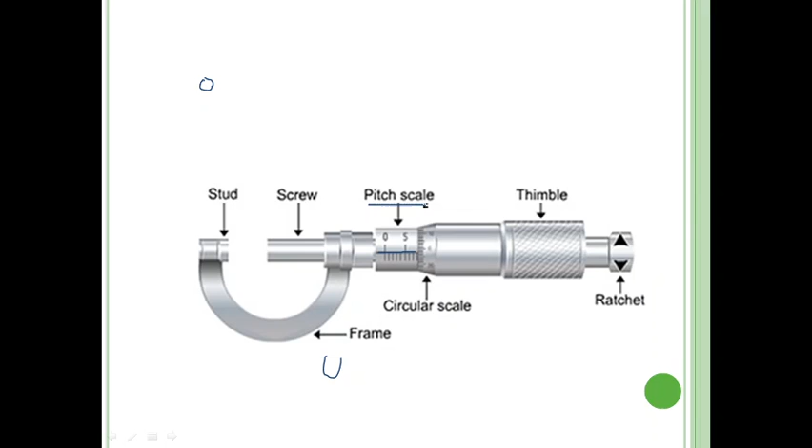We have a cylindrical part over here, over which we have a reference line and small markings made. This scale is called the pitch scale of the screw gauge. These markings will normally correspond to 1 millimeter, though sometimes in certain scales 0.5 millimeter may be marked. Let us take the case of a screw gauge upon which 1 millimeter is marked on the pitch scale, the cylindrical part where we have drawn a reference line and small readings of 1 millimeter.

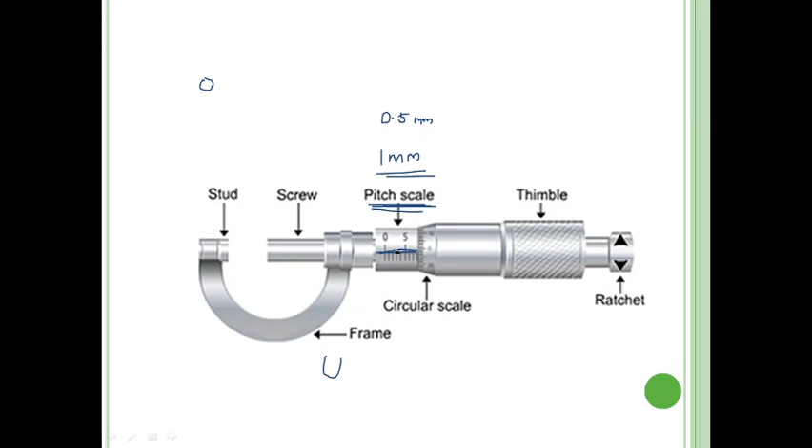Now over this cylinder, we have a cylindrical shaped part which can slide over this pitch scale. This is the circular scale, or the head scale, of the screw gauge. It is cylindrical in shape and is connected to a thimble, a cylindrical shaped thimble, and this part can slide over the pitch scale.

In order to enable this mechanism, we have a ratchet here. We rotate this ratchet and the rotations are transferred to the thimble and head scale, which slides over the pitch scale gradually. These rotations also move the screw attached here, since internally they are connected, and the screw moves forward or backward as you twist this ratchet and thimble.

Finally, at the other end we have a stud which stops the motion of the screw. So these are the different parts of a screw gauge.

We have a U-shaped frame and the pitch scale, which is the cylindrical part over which small divisions of 1 millimeter or 0.5 millimeter are marked. Then we have the head scale, a cylindrical part over which even finer divisions are marked, and which is able to slide over this pitch scale. There is a thimble that connects this head scale, and a ratchet mechanism arranged for its rotary motion.

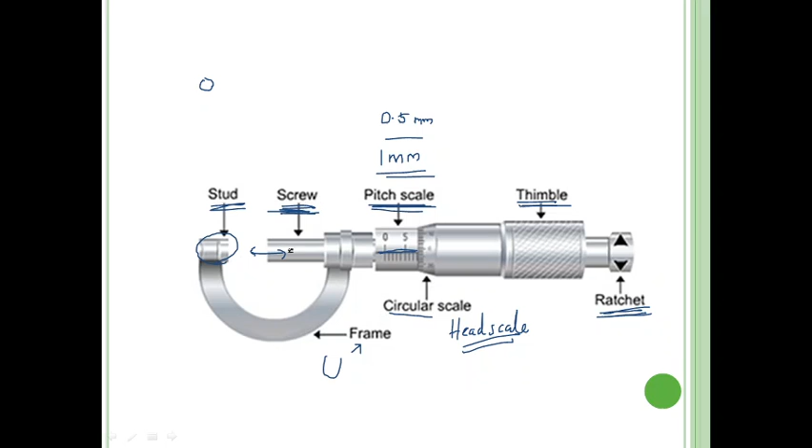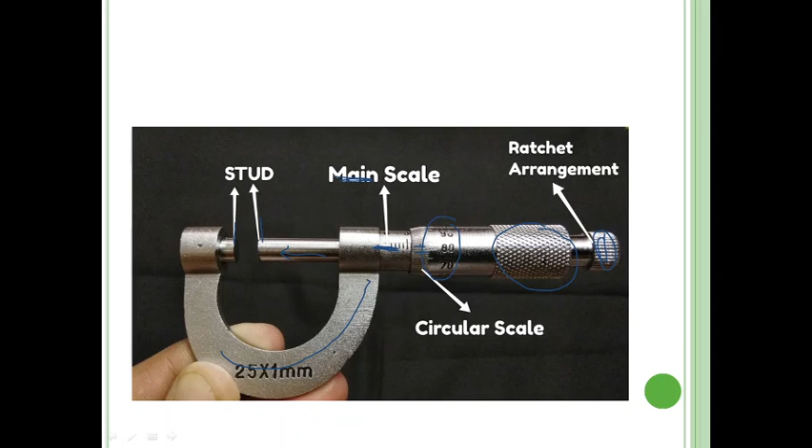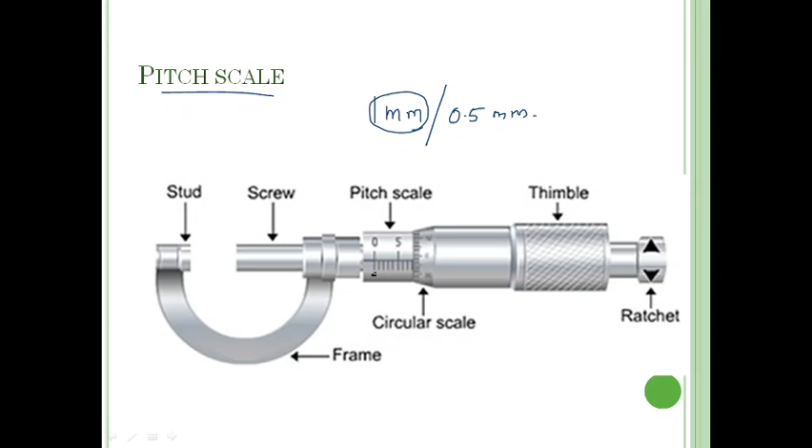Now first let us understand more about the pitch scale of a screw gauge. There is a reference line marked on the pitch scale, and smaller divisions are marked over this reference line. These divisions will either correspond to 1 millimeter or 0.5 millimeter. Let us assume 1 millimeter is the smallest division marked on this pitch scale, so the distance between 0 and 1 corresponds to 1 millimeter here, and this large line corresponds to 5 millimeter reading. That is the purpose of the pitch scale.

We will be taking the pitch scale reading from the pitch scale. We call it PSR, or pitch scale reading. Now there is another scale, the head scale, with divisions marked on it. Sometimes there might be 100 divisions on the head scale, or sometimes 50 divisions.

Let us consider the case when we have 100 divisions on the head scale. In that case, the surface of the head scale, the cylindrical part, the tip will be divided into 100 divisions. Starting from 0, there will be finer divisions, then 5 and so on, and the full rotation will give you 100 division markings.

Now, as I have mentioned, there is a reference line on the pitch scale. This is the reference line, and the reference line is used to take the readings, especially the head scale reading.

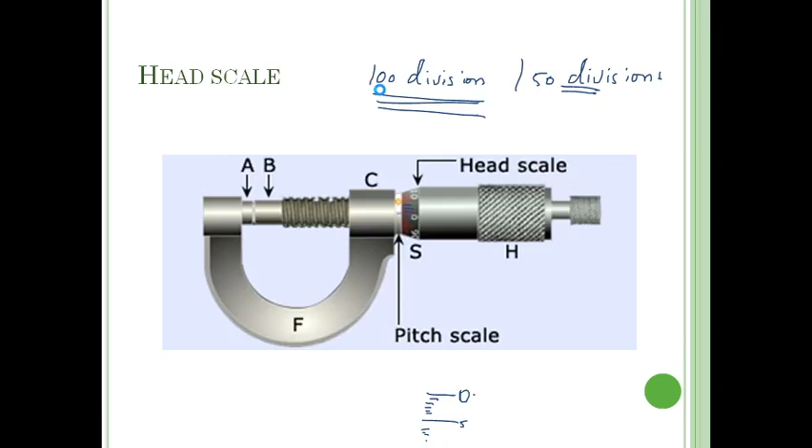Now let us understand the zero correction of a screw gauge. In order to find the zero correction, we first have to move the ratchet mechanism and enable the screw to touch the stud, so there will be no distance between the stud and the screw. They will be touching each other with no gap in between when we take the zero reading.

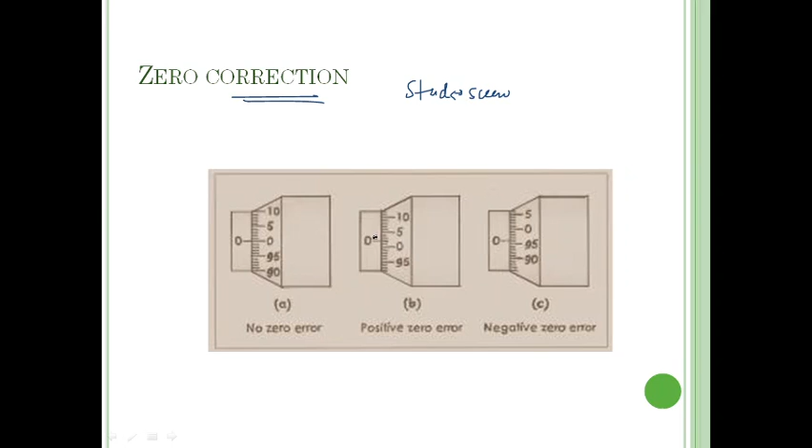When the stud and the screw touch each other somewhat tightly without any gap, we look for the head scale reading. In that position, this head scale will be moving up to the marking of 0. As in this figure, since the stud and the screw are far apart, we can see that this head scale is somewhat away from the 0 marking.

As we move the screw forward, we will be twisting this head scale, and this head scale will proceed over the pitch scale up to the 0 marking. So the pitch scale reading will naturally be 0 when the screw and the stud touch each other, but in that case, the head scale reading may not be 0.

So there might be 3 different cases depending on the position of the head scale when we look for zero correction or zero reading. The 0 point of the head scale reading might exactly coincide with the reference line in one case.

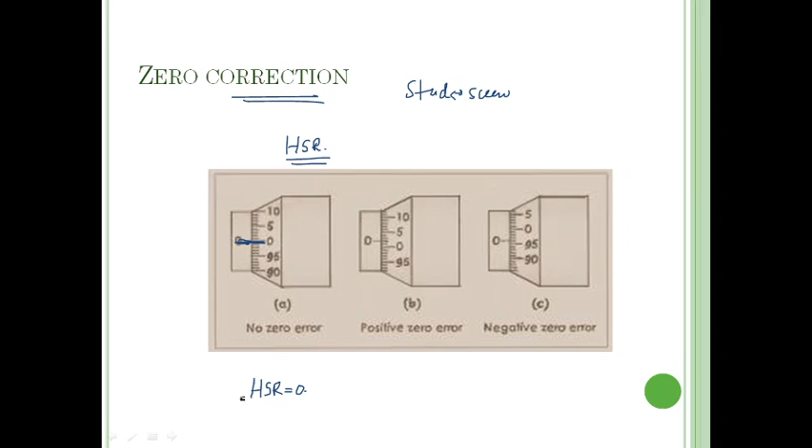So here we say that the head scale reading is 0. More accurately, we say the zero coincidence in this first case is 0. In that case, the zero error will also be 0, and the zero correction will also be 0.

Now let us look at the second case. Here, the 0 marking on the head scale is actually below the reference line. So what is the zero coincidence in this case? It is somewhat, say, 2 — the 2 marking on the head scale is actually coinciding with the reference line.

Then we say that the zero error in this case is +2. That means if the 0 marking on the head scale is below the reference line, the zero error is positive. So to correct this, the zero correction we must bring on the head scale reading is -2, because +2 is the zero error and -2 must be the correction.

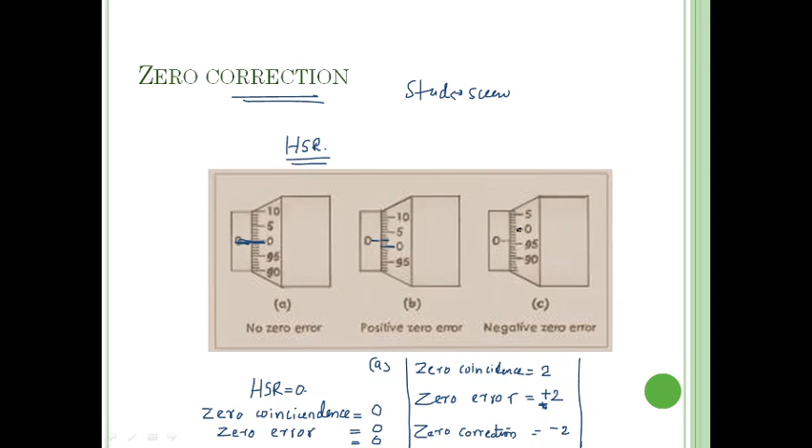Now let us check the other case. Here, the zero reading on the head scale is above the reference line. When we look for zero coincidence, it is the division on the head scale that is exactly coinciding with the reference line. In this case, the zero coincidence is 96 — this is 95, 96, 97, 98, 99 and 100. So the 96th marking on the head scale is actually coinciding with the reference line.

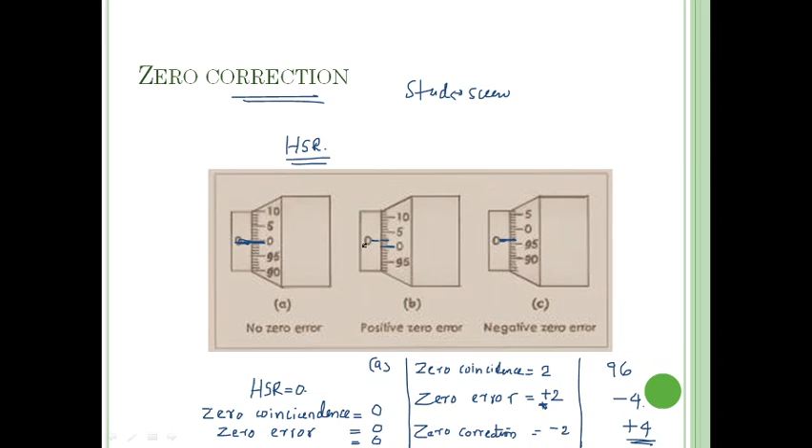Then what will be the zero error? It is actually -4, from the 100th or 0th marking — negative, since the head scale is displaced in the negative direction. So the zero error is -4. And what should be the zero correction? If the error is negative, correction should be positive, so it should be +4. This is how we do zero correction on a screw gauge: we look for the coincidence of the head scale reading with the reference line at the tighter position, and then we calculate the zero error and the zero correction.

Now let us look at what is the least count of a screw gauge. In order to find the least count, first we should look for the value of pitch. By pitch, we mean the distance moved by the head scale in one complete rotation.

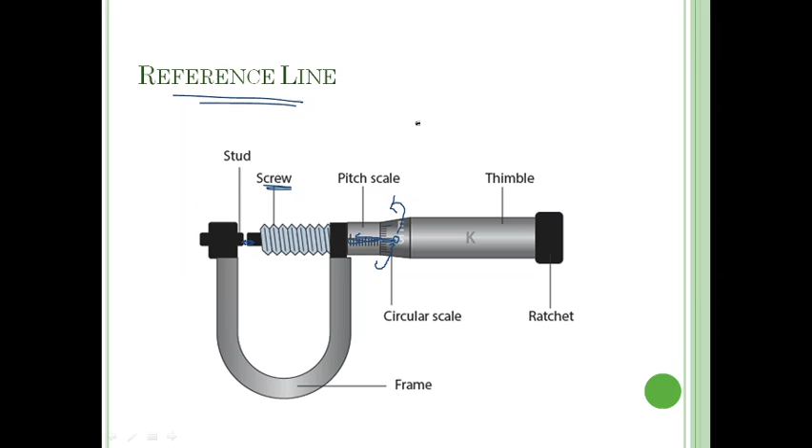So we will be moving this head scale in a rotated manner. If 0 is here, and we move it in a clockwise direction, then finally when the 0 reaches back this position, the head scale has made one complete rotation. During that rotation, this head scale will be proceeding forward, and the distance it proceeds forward in one complete rotation is denoted by the term pitch.

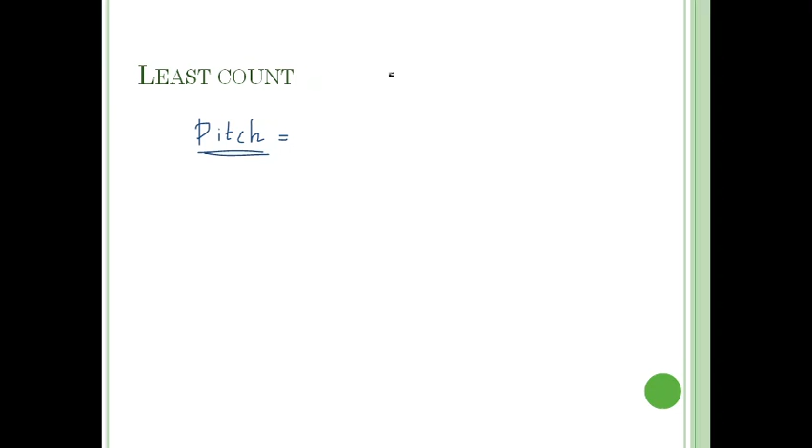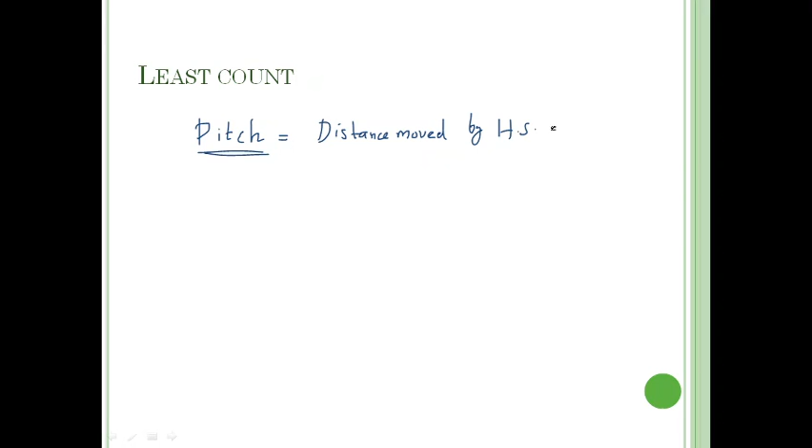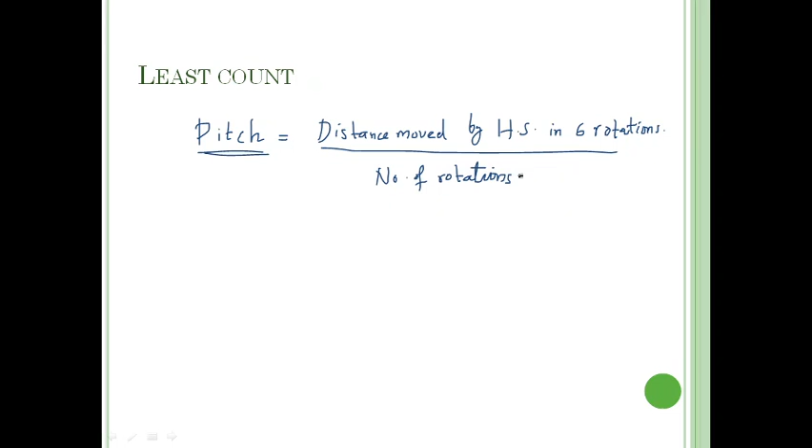So in order to find pitch, we make some number of rotations on the head scale, say 6 rotations, and we note the distance moved by the head scale in those 6 rotations. We divide that distance by the number of rotations to exactly find the distance moved by the head scale in one rotation. So distance moved by the head scale in 6 rotations is divided by the number of rotations, which is 6. This gives you the pitch — the distance moved by the head scale in one complete rotation.

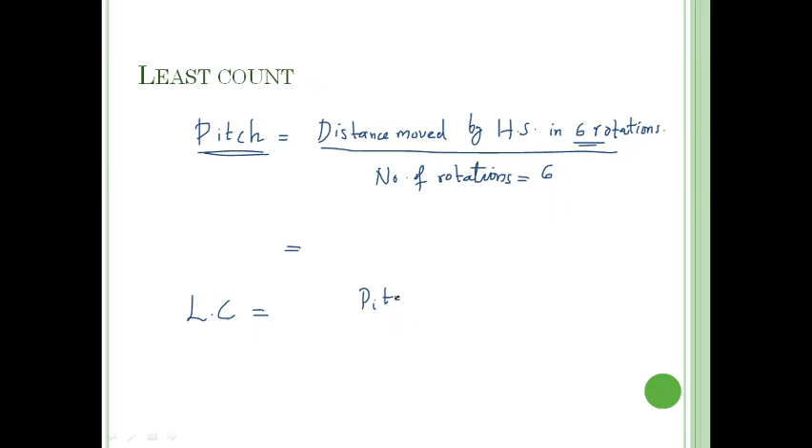Now having found the value of pitch, we can proceed to find the value of least count of a screw gauge. It is given by pitch divided by the number of divisions on the head scale.

So if we find that distance moved by the head scale in 6 rotations is say 6 millimeters, and number of rotations is 6, then the pitch is 1 millimeter. Normally in most screw gauges, pitch is 1 millimeter, or sometimes 0.5 millimeter. So let us take the case of 1 millimeter.

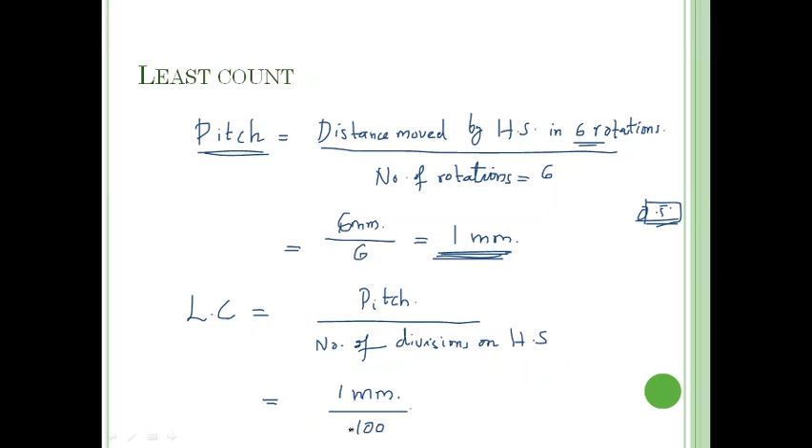Least count will be pitch divided by number of divisions on the head scale. So it is 1 millimeter divided by say 100, if our head scale has 100 divisions, which is equal to 0.01 millimeter. So normally in most screw gauges, we can measure up to 0.01 millimeter, which is the least count of most screw gauges.

Sometimes this value might differ depending upon the pitch or number of divisions on the head scale. In certain cases this might be 50, in certain cases 100, and pitch might also vary depending on the device we are using, either 0.5 millimeter or 1 millimeter. So we have taken the case when pitch is 1 millimeter and number of divisions on the head scale is 100.

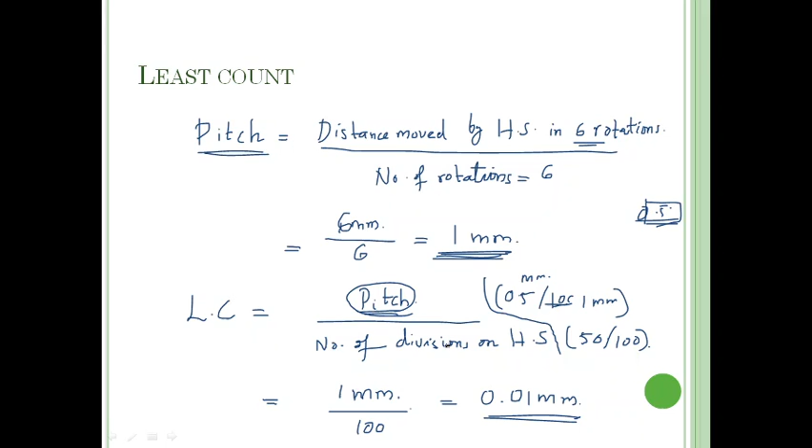Now let us calculate the total reading of a measurement. Before that, let us check how we take measurements using a screw gauge. For that, we place the object whose diameter is to be measured in between the stud and the screw. The stud is also called anvil.

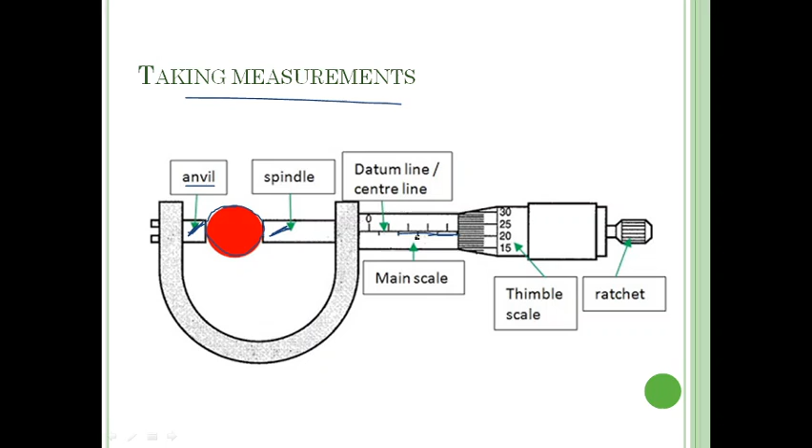Here we have to measure the diameter of a glass ball. We place that ball in between this stud and the screw tightly, and we move this ratchet in order to make it tight, and after that we look for these readings. So suppose we get this kind of reading here.

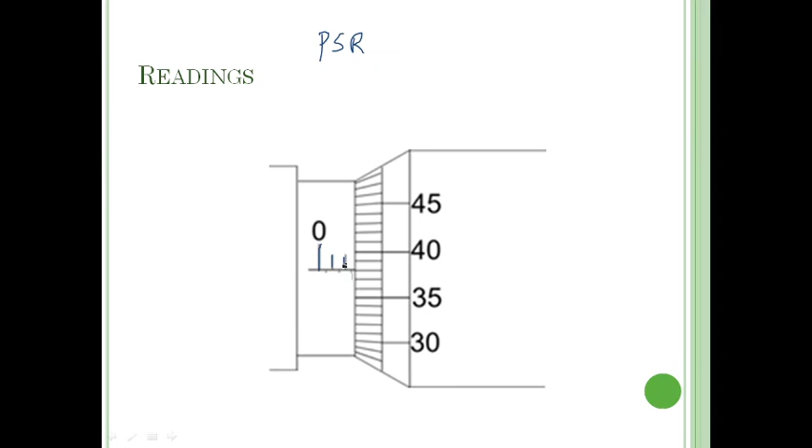As you can see, first we go for the pitch scale reading, PSR. In this case, on the pitch scale, you can see the 0th marking, this is the 1 marking, and this is the 2 marking. So the pitch scale reading in this case is 2 millimeter.

After that, we go for the head scale reading. Here you look for the reading on the head scale that coincides with the reference line. As you can see, this is the 38th division, 35, 36, 37, 38. So head scale reading is 38.

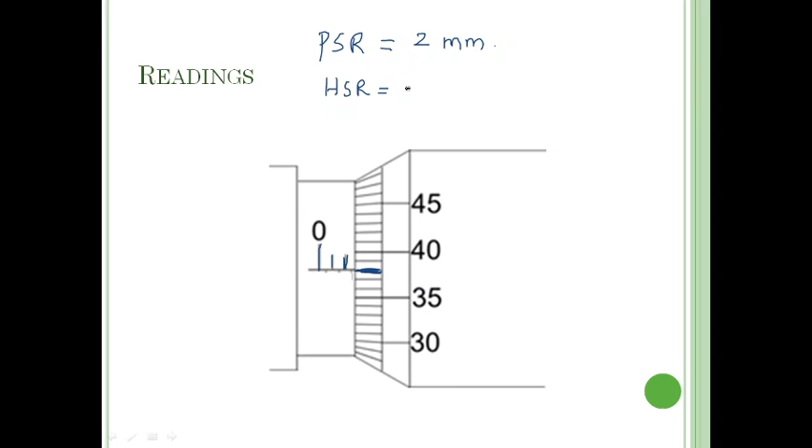After that, you will have to find the corrected HSR. To find the corrected HSR, you add the zero correction along with this HSR. Suppose the zero correction is plus 2, then corrected HSR is 38 plus 2, which is 40. Neither the HSR nor the corrected HSR has any unit. Only the PSR has a unit depending upon the value of pitch.

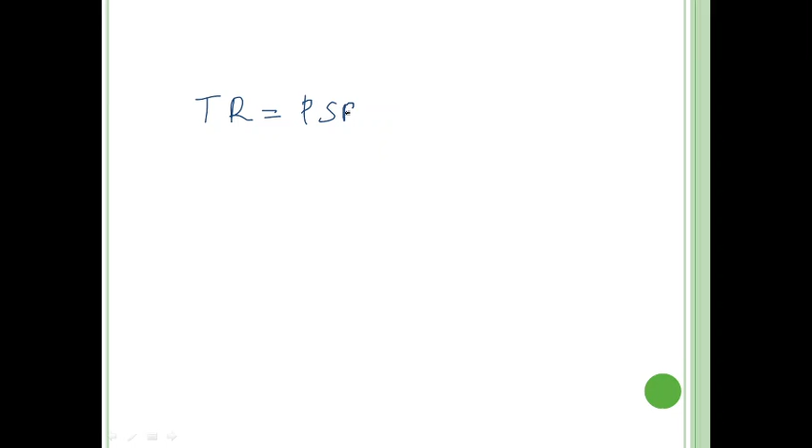In order to find the total reading, we use the equation: total reading equals PSR plus HSR into LC. In the previous case, it is 2 millimeter plus the HSR, which is 40. But HSR must be corrected, so total reading is PSR plus corrected HSR into LC.

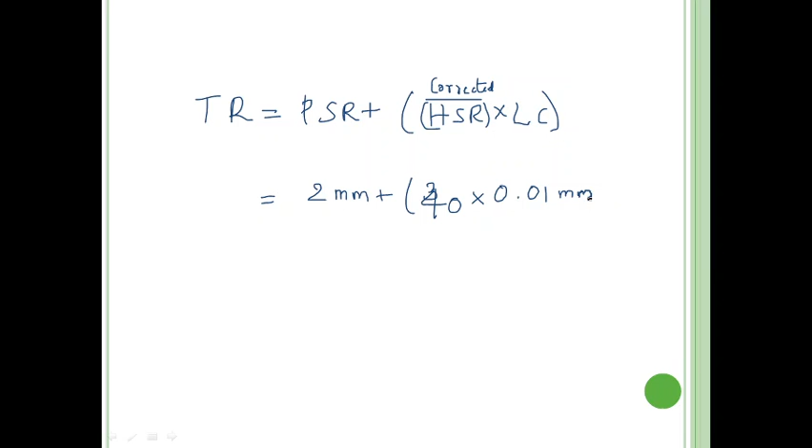So 2 millimeter plus corrected HSR, 40, multiplied by the least count, which is 0.01 millimeter. This is equal to 2 plus 0.4 millimeter, which is equal to 2.4 millimeter. So this will be the total reading in this particular case.

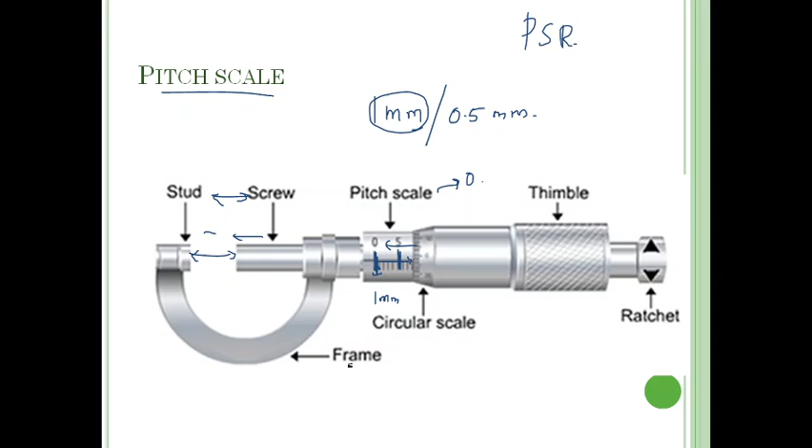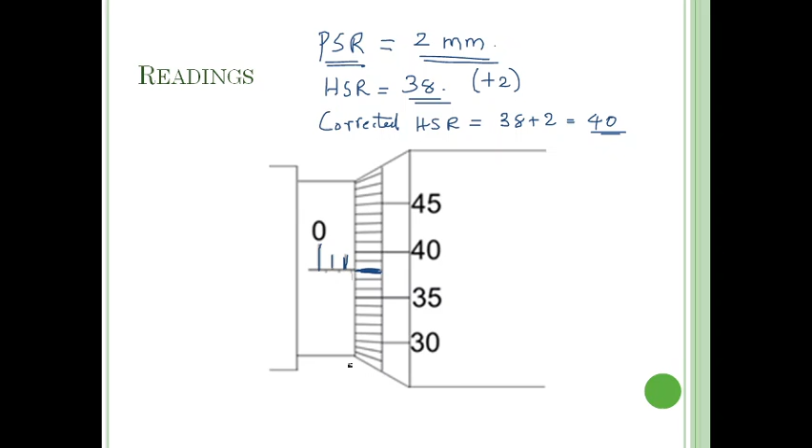So this is how we take measurements using a screw gauge, and these are the basic working mechanisms of a screw gauge. We have seen different parts of the screw gauge, tried to understand the working mechanism, and learned how to make zero correction, calculate the least count, and finally take measurements using the screw gauge. I hope this portion is clear for you. Now, hope that you will check the screw gauge once you get to see them more closely.

Now coming to screw gauge versus vernier caliper. Screw gauge can actually measure lengths even smaller than those measured by vernier caliper. For example, in the case we considered, the screw gauge was able to measure up to a least count of 0.01 millimeter. What is the least count of a vernier caliper? It is just 0.1 millimeter. So even smaller lengths can be measured using a screw gauge.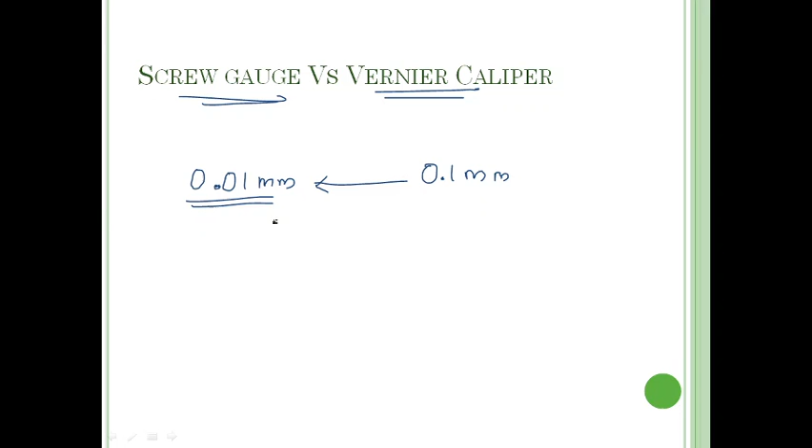It is also called a micrometer because at the time it was invented, it was one of the devices able to measure the smallest of lengths, hence the term micro indicating small and meter indicating a measuring device.

So when we compare screw gauge and vernier, screw gauge can measure even smaller distances. 0.01 millimeter is 0.001 centimeter, or 0.1 millimeter is 0.01 centimeter. So while this is the least count of a vernier caliper, a screw gauge has an even smaller least count, which enables us to measure the thickness of even smaller objects. So in order to measure the thickness of a wire, often we use a screw gauge, and for lengthy objects we use a vernier caliper.

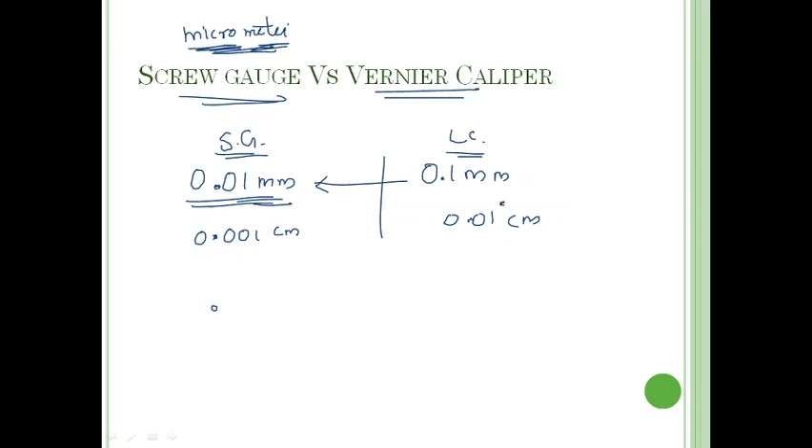So I hope this portion is clear for you. Thank you.